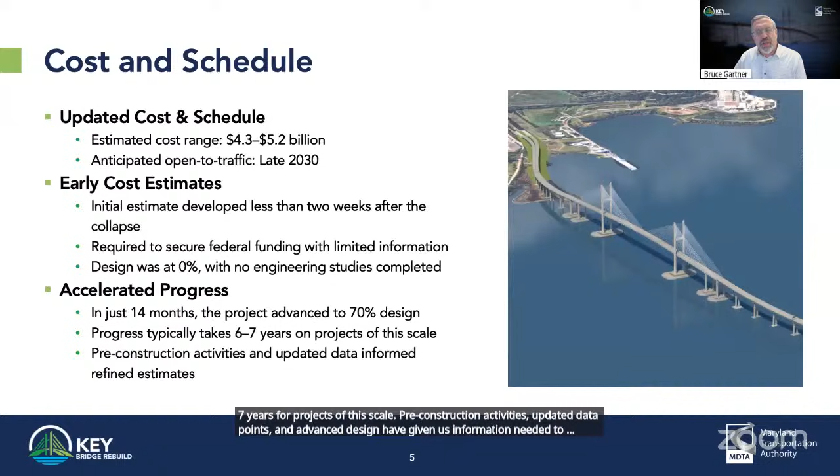The updated range of costs for the new bridge is driven by pier protection, a higher and longer main span, and the continued volatile market conditions for construction. The MDTA refined the estimate to reflect modern design standards, federal requirements, national best practices, including enhanced pier protection, updated engineering and architectural standards, and the federal navigation clearance requirements, including a 230-foot main span height.

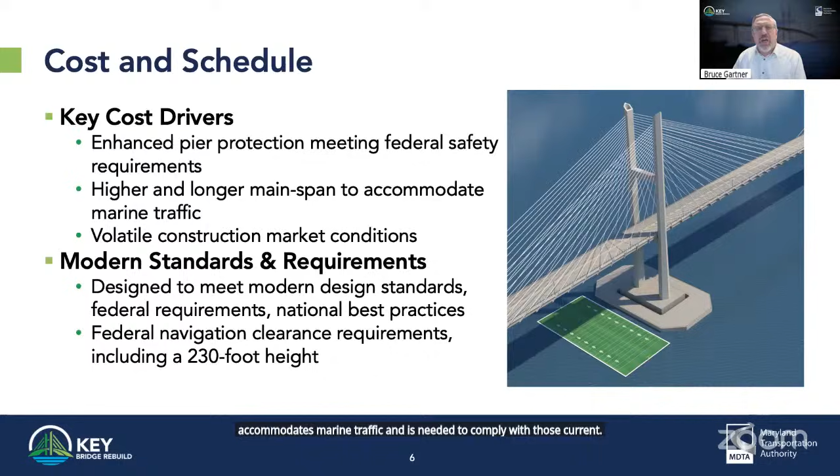Specifically, the enhanced pier protection system is over $1 billion to meet federal guidelines, with protective fenders designed larger than a football field. The increased length of the main span, now 1,660 feet, accommodates marine traffic and is needed to comply with those current federal guidelines for new bridges. The updated cost reflects modern standards and the complexity of this bridge.

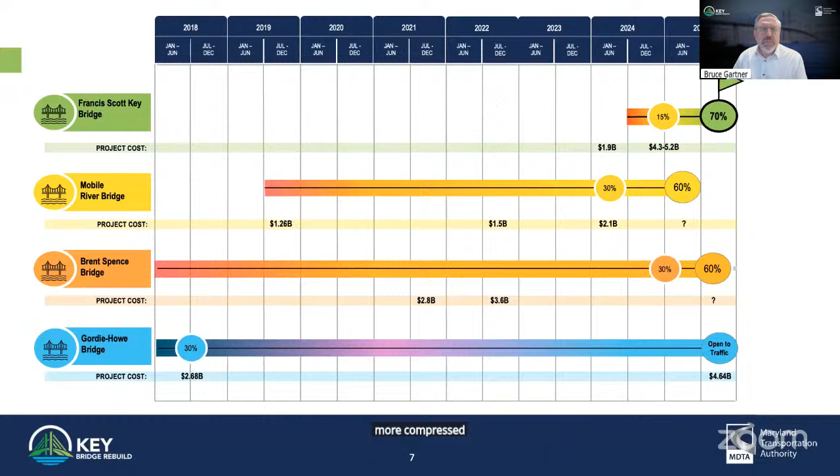With this slide, we just want to take a moment to look at bridges from around the country and projects of this size and magnitude. For those types of projects, the cost of the Key Bridge rebuild is on par with other projects. However, the project is moving at a much more compressed schedule. And we've also come out with a much more recent design estimate than some of the other bridges that will be doing that in the near future.

While I realize that 2030 is a long way from now, please be assured that the MDTA is moving quickly to begin construction next year while looking for new solutions to traffic in the Baltimore region.

The MDTA is working day and night to deliver a new bridge that the community members can be proud of and drive across once again. Since the beginning of the project, Maryland has been and will continue working in lockstep with the Federal Highway Administration on all aspects of the project, including permitting, design specifications, cost, and schedule.

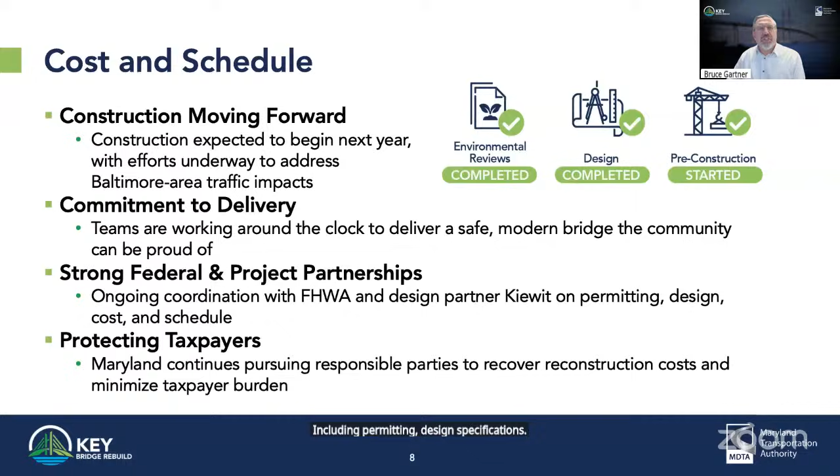To minimize burden on taxpayers and consistent with the American Relief Act passed last year by Congress, the state of Maryland continues to pursue the Dali's owner and manager for all damages that it caused the collapse, including the cost to reconstruct the bridge. Together, we'll continue working closely with our federal partners and design partner Kiewit to deliver a safe, modern bridge as quickly and cost-effectively as possible.

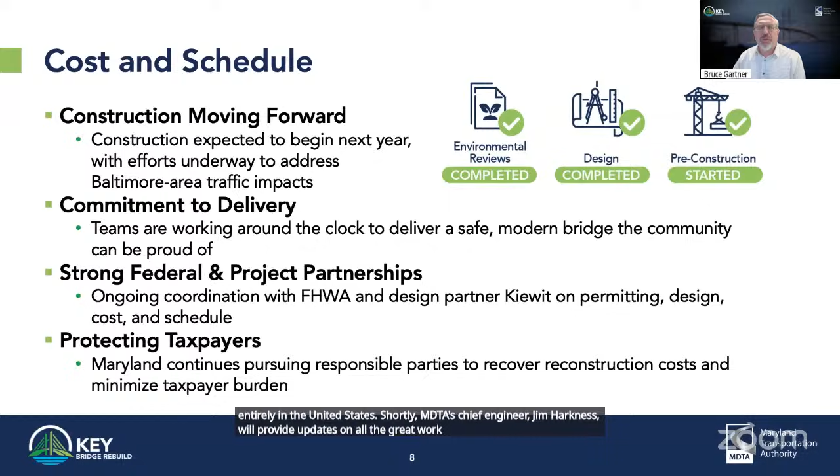When complete, Baltimore will be home to Maryland's first cable-stayed bridge, which will have the longest main span entirely in the United States. Shortly, MDTA's Chief Engineer, Jim Harkness, will provide updates on all the great work the project has gone through thus far and what work lies ahead.

So the original Key Bridge was a vital connection for many Baltimore drivers, and we really do thank you for your patience as you adjust your alternate routes and your carpooling and transit options. We know traffic has been challenging, and we wanted to provide a brief overview of the steps we have taken to help manage congestion during the rebuild. The traffic is being monitored across I-95, 895, and the tunnel corridors. Coordination with traffic agencies is ongoing, along with temporary measures to ease congestion.

One of those measures was to suspend tolls at the I-695 Broening Highway exit to support the port and access during the rebuild process, and that will continue throughout the rebuild process. Northbound on I-895, the toll plaza was adjusted to improve merging and traffic flow. On 895, we converted to all electronic tolling with the toll booth removal planned for after the rebuild, and we'll talk more about that later. But most recently, just south of the I-95 Fort McHenry Tunnel, we have included new pavement markings that were added to improve traffic flow.

To share more about current traffic conditions and some commuter options, I'd like to introduce Joe McAndrew, Assistant Secretary for Project Development and Delivery at the Maryland Department of Transportation. We truly do appreciate all the assistance from our colleagues throughout MDOT during this difficult time. Joe, turn it over to you now. Thank you, Director, and thank you all.

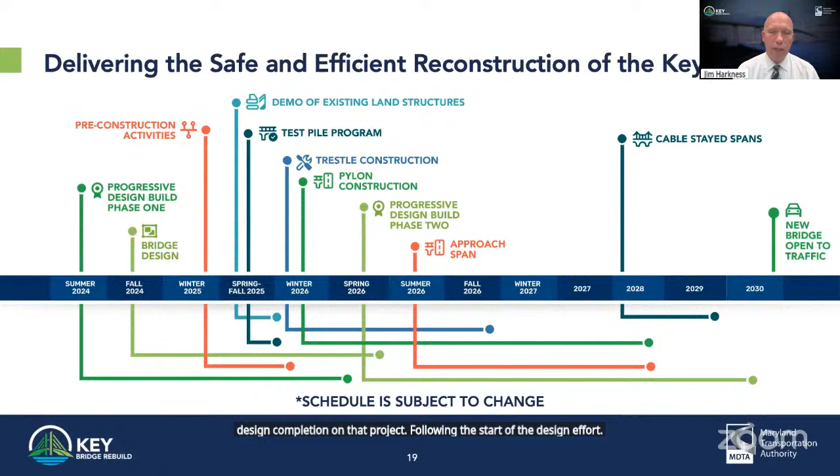And speaking of the design effort, we began that back in fall of last year. That design effort kicked off in earnest in September and will continue through spring of next year. But most recently, we've reached an important milestone of 70% design completion on that project. Following the start of the design effort, we then commenced what we call pre-construction activities last winter. Pre-construction activities were things that we were able to do as part of the design effort or to inform the design effort.

Following the start of pre-construction activities, we were able to have an early work package on the project that allowed us to perform demolition of the existing land structures. That work began this summer in July and will continue until early next year. After starting demo, the contractor then began a test pile program. That test pile program began in October, and it will also continue into early next year.

Now, looking ahead on the project, we have trestle construction, which we look to start this winter over the next couple of weeks. We also look to start our pylon foundation construction.

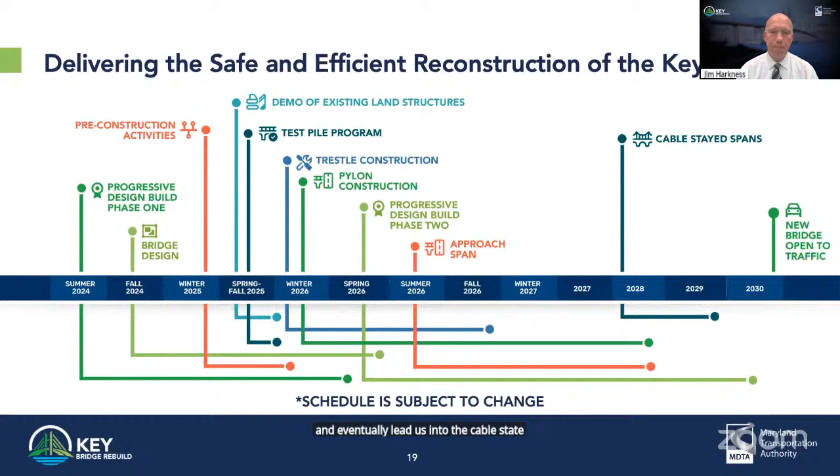Following up on this, we anticipate taking our progressive design build contract and moving into phase 2. Phase 2 is also known as the construction phase. So if we are able to enter into a contract with our current design builder on phase 2, that will allow us to begin approach span construction, as well as continue the pylon construction, and eventually lead us into the cable-stayed span construction. And now we can get into the project numbers.

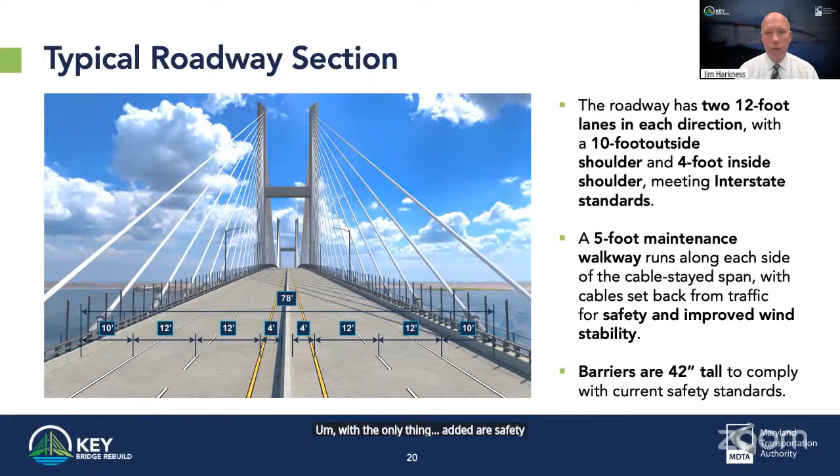Shown here is a typical section for the new bridge. This is a standard interstate cross-section for a large bridge. As you can see, we will have 4 lanes on this bridge, similar to the former bridge. But in addition to the 4 lanes, we will now have shoulders, 10-foot shoulders on the outside, 4-foot shoulders on the inside. As you can see from this image, this is a no-frills bridge, with the only things added being safety upgrades when you're comparing it to the former bridge.

On this slide, we are highlighting the shape of the cable-stayed bridge and some of its critical dimensions. We're also showing the 6 piers that support the cable-stayed span, including the 2 main piers, which we refer to as pylons. The main span length of the new bridge is 1,665 feet, and that dimension was driven by the AASHTO specification for new bridges. That distance enhances the safety of the new bridge by increasing the spacing between the 2 pylons.

Another dimension shown here is the minimum clearance over the federal channel. That distance is 230 feet, as required by the U.S. Coast Guard. The main span length and the minimum clearance help to determine the height of the pylons, which top out at more than 600 feet above the water. For these pylons, due to the massive amount of concrete needed to construct the towers, we will be constructing the pylons in multiple lifts, each tower requiring more than 30 lifts, which will be approximately 20 feet high.

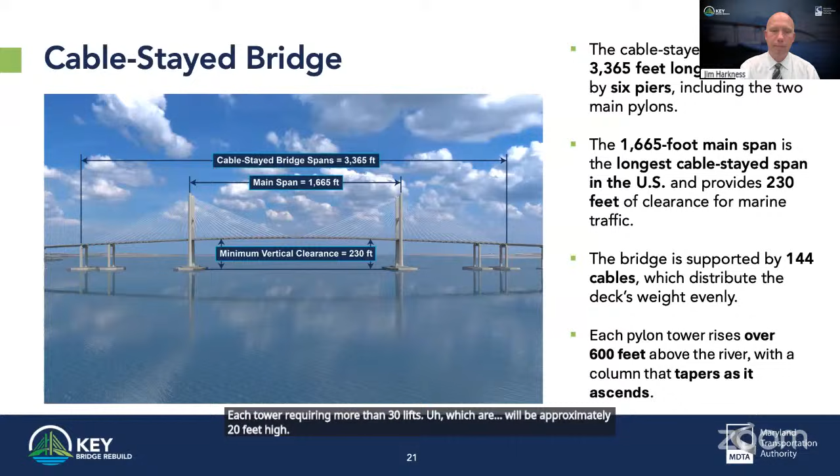Now we can move on to the pylon foundations. Each pylon will rest on 45 steel piles. Each of those steel piles is over 200 feet long, and they are 8 feet in diameter. The pylon foundation is a concrete cap that ties the piles together. The pylon foundation is over 20 feet thick, made of reinforced concrete, and it is roughly the size of 2 basketball courts.

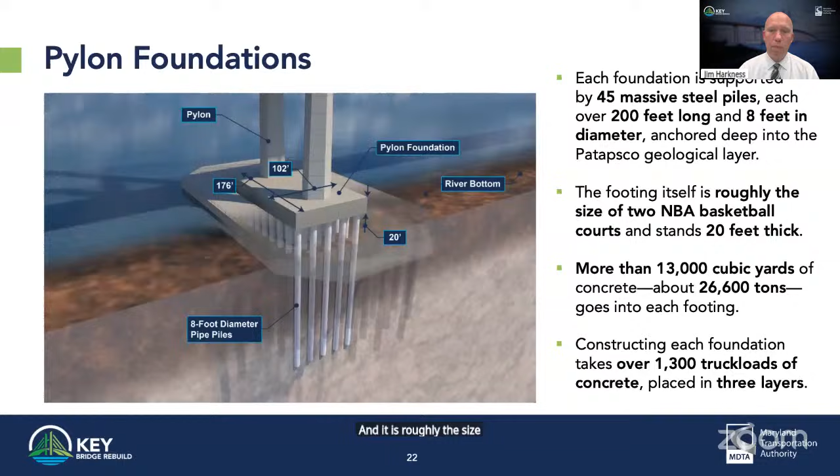In addition to the pylon foundations, we have additional cable-stayed bridge foundations. We have significant foundations for the tie-down pier and the transition pier, which are located on each side of the main span. The foundations for these smaller piers will have 10 piles each, using the same 200-foot long by 8-foot diameter pile for those footings. In total, there will be 6 cable-stayed bridge piers using 130 8-foot diameter steel piles.

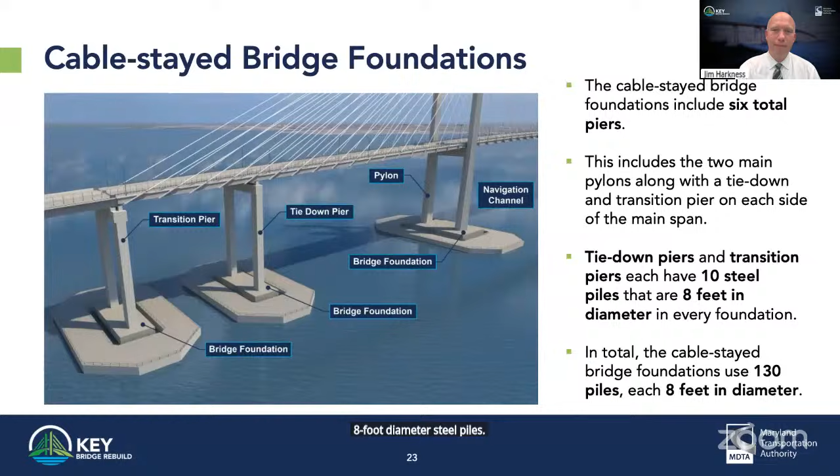Now we'll move on and talk a little bit about the pier protection for those 6 cable-stayed bridge foundations. We refer to these bridge protection systems as a fender. Each of the 6 piers will have a reinforced concrete fender. Each fender will make use of the same 8-foot steel pile as was used in the foundations. The pylon's pier protection system uses 78 steel piles, and that's for each of the 2 pylons. In total, the 6 fenders will use 276 concrete-filled steel piles, each of which are 8 feet in diameter.

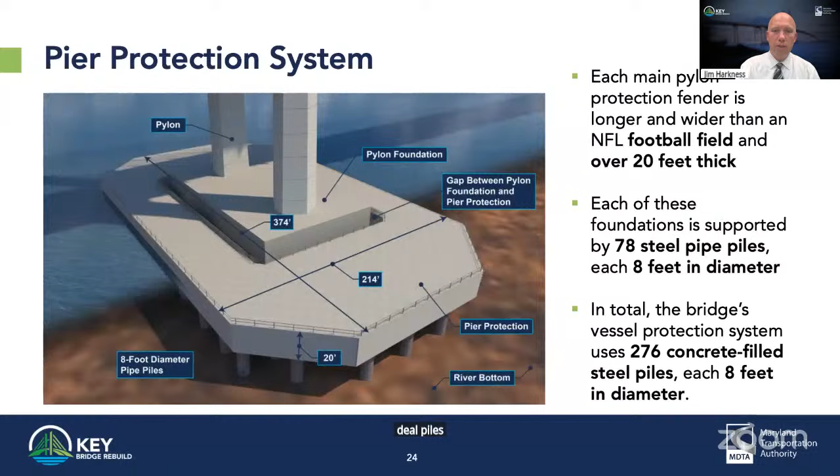Now that we've covered a lot of the details that emerged from the intense design effort, which started last year, we'll talk a little bit about pre-construction activities, which we were able to start earlier this year. The first of which is the geotechnical borings. The geotechnical borings are used to sample the soil at the project site, both on land and in the water. The data acquired from the geotechnical borings is used to inform our design and help us with the foundation design, which led to the piles which were mentioned earlier.

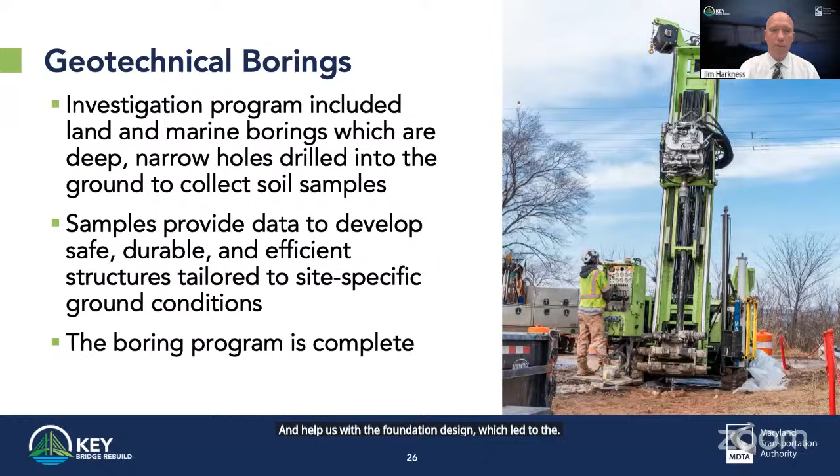Another pre-construction activity was the wind tunnel testing. The bridge design underwent a multitude of various wind testing scenarios, each of which was necessary to confirm how the bridge would respond in a variety of extreme weather and powerful wind events.

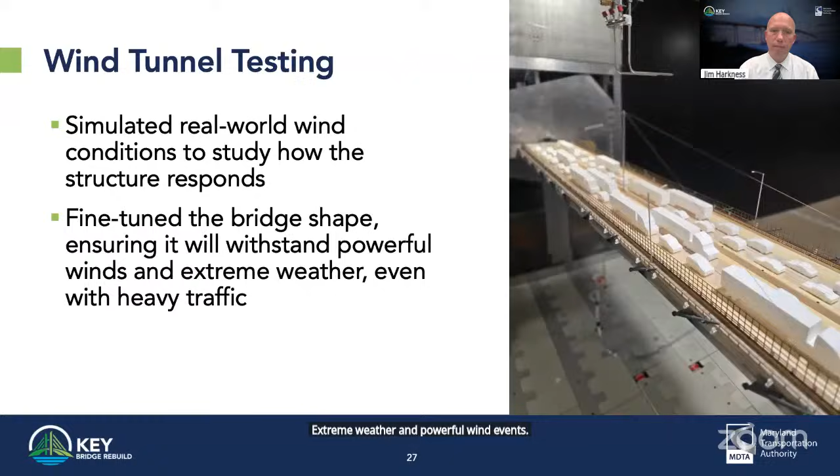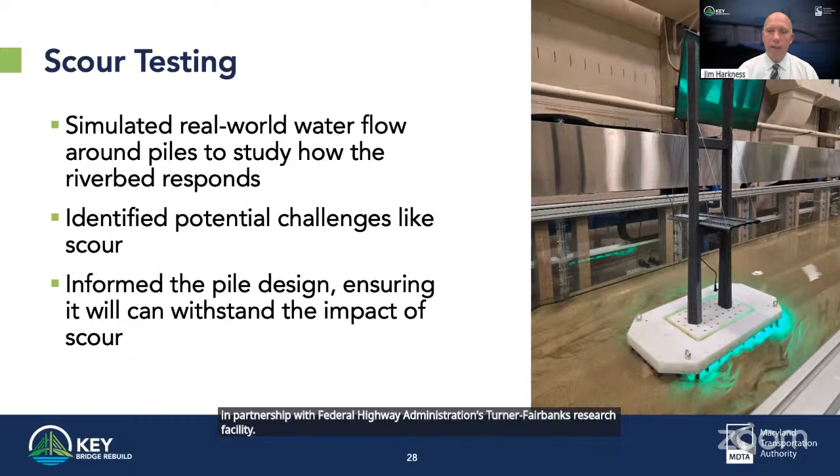A third example of some of our pre-construction activities was scour testing. In partnership with Federal Highway Administration's Turner Fairbank Research Facility, our design underwent testing by running through their flume model. They simulated the actual conditions that our foundations would experience in the river to determine how our bridge foundation would respond to impacts from various scour analyses.

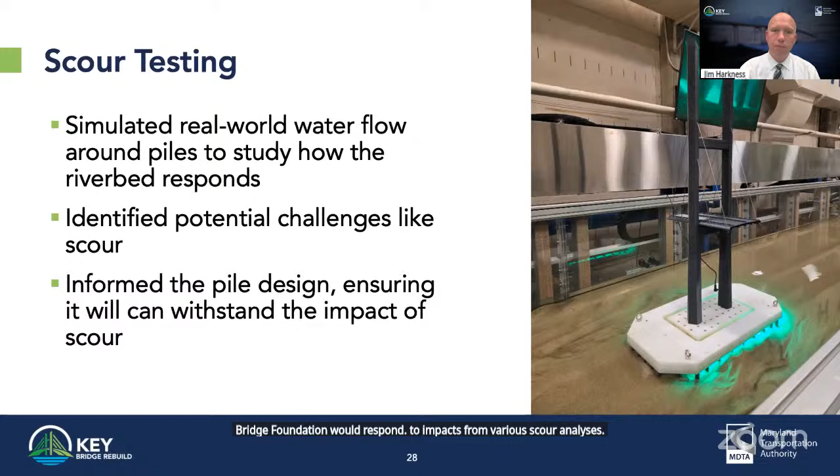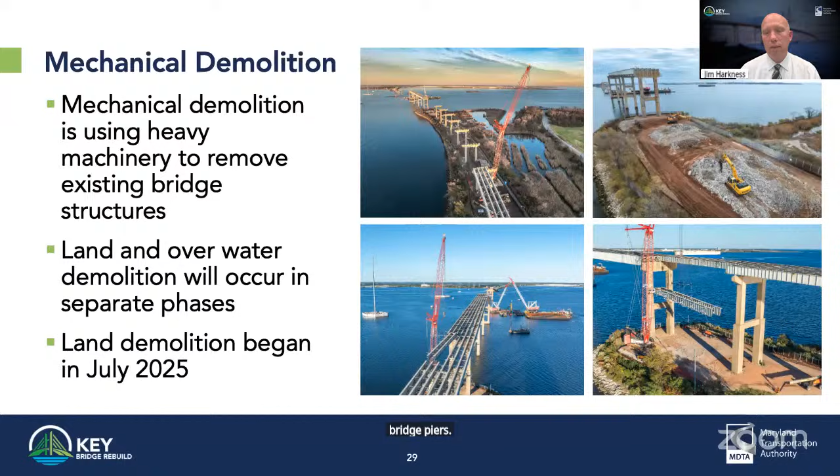As I mentioned earlier, we have mechanical demolition of the existing bridge structure. So in July, we started this effort with the contractor to remove the existing structure over land. That contractor removed the concrete deck, has removed the steel girders, and has begun working on removing the reinforced concrete bridge piers. That work is expected, as I said, to continue until early next year.

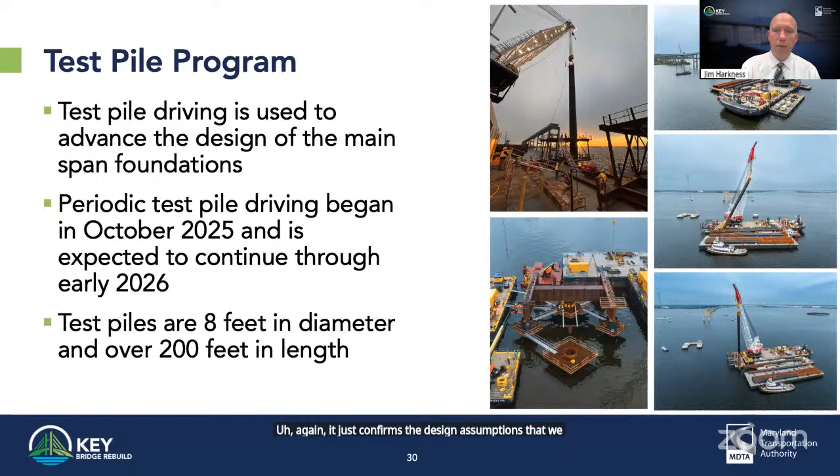Additionally, we have the test pile program. So the contractor has installed 12 test piles out in the river. These test piles will be used to confirm our design assumptions. The contractor will be working on carrying out those tests over the next couple of weeks. The testing has begun and will continue until February. That information from the test pile program, again, just confirms the design assumptions that have been built into the project.

And now we'll talk a little bit about the trestle construction that's upcoming. So expecting to start this work this month. We are currently preparing the Hawkins Point side for this platform work. So a trestle is a temporary platform that's constructed to enable the contractor to get supplies and equipment and manpower out to the locations to be able to work on construction activities out on the water more easily.

In December, the crews will start driving piles to extend the trestle on the south side, the Hawkins Point side. And then in early 2026, crews will start building a second trestle on the north side from Sollers Point. In total, the two trestles will cover about 3.4 acres of area in order to support the construction on the water.

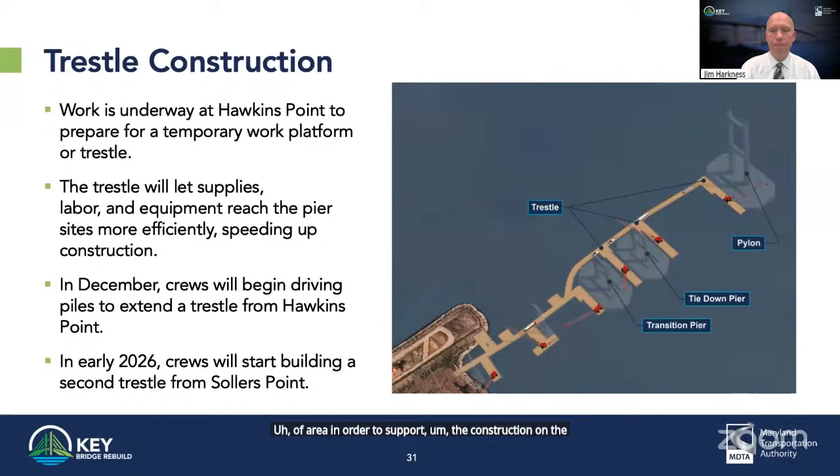Now that we've talked about a lot of the activities that are going to be happening out at the project site, we just want to kind of go over some of the safety measures that we have in place. We have installed and implemented a safety zone in coordination with the U.S. Coast Guard. So it's a no entry area that's 500 feet in each direction from the existing bridge. We also have a 6-knot no wake zone established earlier this year, which is to protect both boaters as well as construction crews. I will call out that the federal channel remains open with no speed restrictions. And now I'd like to turn things back over to Bruce.

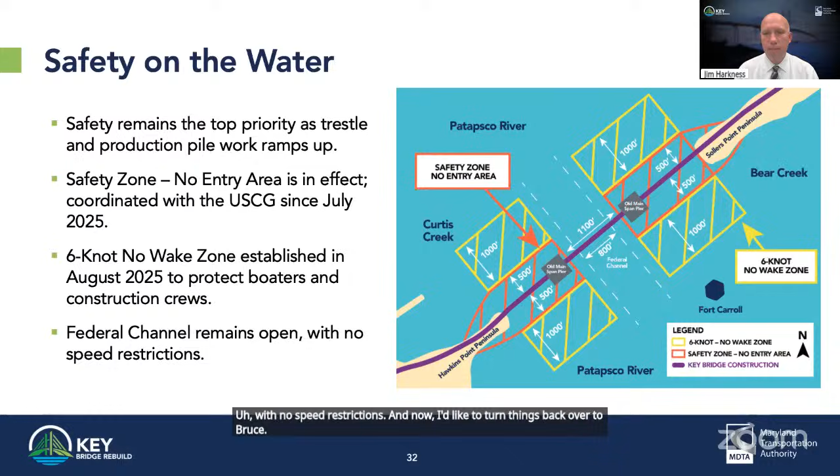Thanks, Jim. As we continue moving forward with the rebuild, community engagement does remain a critical part of this effort. I'd like to take a moment to highlight how we've been staying connected with stakeholders throughout the process. Engagement isn't just about communication, it's also about opportunity. We know we have a number of industry professionals registered for tonight's update, so we wanted to include opportunities with our design builder here. As phase 1 approaches completion, Kiewit will begin soliciting subcontractor pricing later this year for inclusion in the phase 2 cost estimate.

Now on to engagement. Since the beginning of the project, we've connected with thousands of people through in-person outreach and digital platforms. That includes more than 100 pop-up events, 50 speaking engagements, and a growing audience through email and social media. We also share regular updates through the weekly KeyBridge Brief, our Bridging the Facts Facebook series, and the Connected Project newsletter. These tools help break down complex topics and keep the community informed between meetings like this one. We encourage you to stay connected by signing up for project alerts, following us on Facebook, and sharing feedback through our hotline or email.